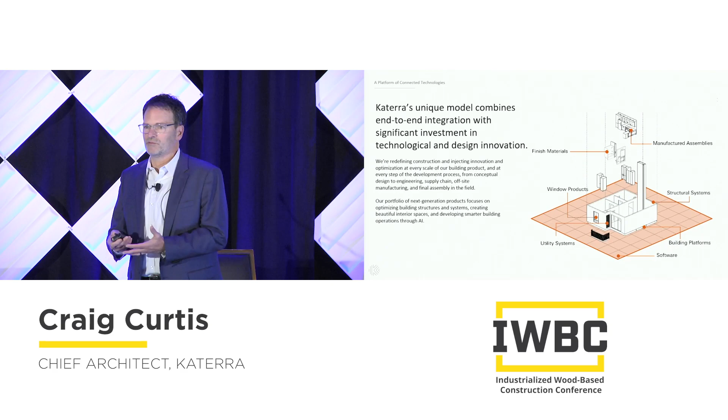And then my role as chief architect is to make sure this does not become cookie cutter. The often overused analogy, or metaphor, is the automobile industry, but I'm going to use it anyway because I think it's a good one.

When you think about picking a car, if you buy a new car, you've got options on the inside, and you know for sure that no matter what option you select out of that catalog, it's going to look great because that manufacturer owns the supply chain, and they know every possible combination, and they're not going to put something in their catalog that doesn't look great.

So we're taking that same approach. We have a narrow supply chain, a narrow catalog for our multifamily sector, but we know every product has passed our test, not only for aesthetics, but for environmental responsibility, for social responsibility if these products are made in Asia. And so any combination of these materials we feel really good about.

Then we can also go and design our own products where we feel like we want to have even more control over those things where the customer actually comes in contact with. If we don't see something in the marketplace that meets our requirement or meets our price point, we'll go straight to the manufacturing floor in China or wherever and have that product made, put our name on it.

Now under the brand Kova, which you can go online and shop for things like door hardware and plumbing fixtures that are a Katerra brand under the Kova brand. So we have a light fixture line, we have accessories, fixtures, and we'll continue to expand that Kova brand of things that we feel really good about. They're beautiful products, very high quality, and we can provide them at a very, very good cost.

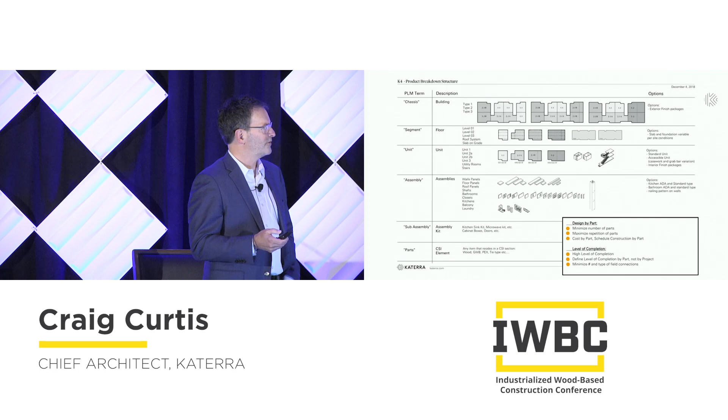So we're really excited about this product. Three different units, optimized, very few — there's a very limited kit of parts that we have to be responsible for. Each of these manufactured assemblies we want to be able to make in our factory.

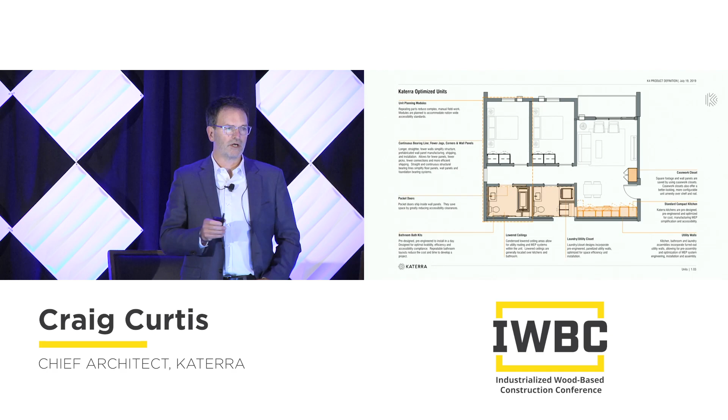And then the planning is very smart. So you can see on the bottom of the page, all of the services are organized along one floor panel. So when we look at that floor panel, this is that same part of the building in the floor panel in the upper right. That floor panel then can be manufactured in our factory, fully loaded with all of the services.

So when that is dropped on site, that's it. All the services for those 2 units are completely done in that one assembly. And that allows the rest of the building to go together very, very quickly.

So it's that kind of thinking that's been really interesting as an architect to work for Katerra, when we're thinking about putting these buildings together more as you would assemble a phone or a printer or an automobile. It's really we have to take it to the level of a bill of materials, which is not common in this industry. So we have to think about manufacturing in a new way.

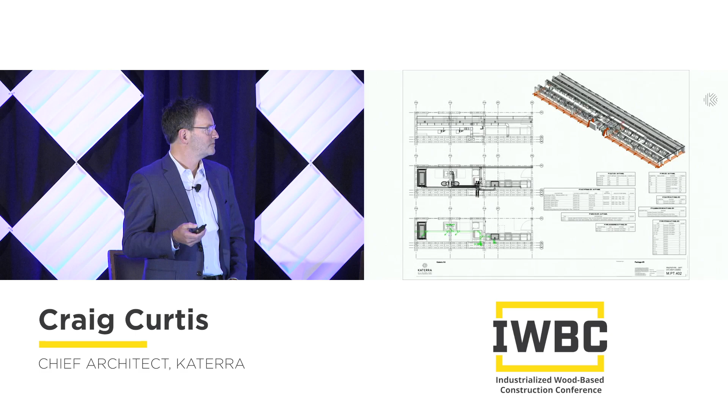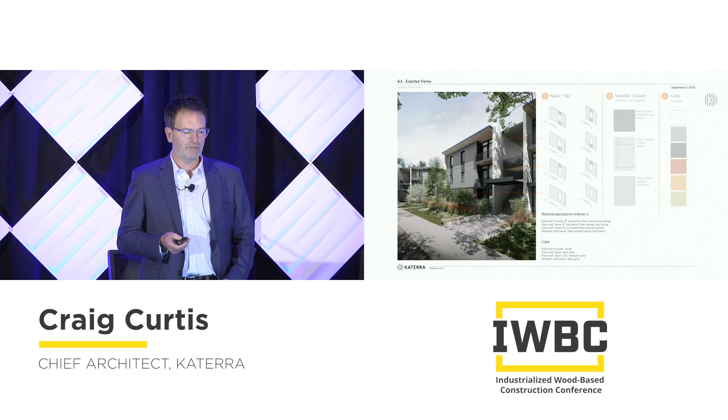We're still trying to apply lots of options on the outside, though, so you can meet jurisdictional requirements, provide that kind of variety, provide that mass customization. So in the case of our workforce product, we have different materials, different colors, and different arrangements. All of those components can be made in one of our component factories.

Currently, we have one in Phoenix, and I will not be showing you that today because I think it would be embarrassing to this crowd. We've got a sophisticated group here who understands what it takes to put together an automated factory, and the Phoenix factory is not an automated factory. It's factory 1.0 for us.

We learned a lot, but the factory that you see here is under construction in Tracy, California right now, and this is one that we're going to be very proud of. We've taken a lot of lessons from our first one and applied them here, so we've got a lot of robotics going into this factory. It's over twice the size at 600,000 square feet, but will employ about the same number of people as Phoenix.

So the lines are much more automated. We're using self-guided vehicles for a lot of delivery around the factory, and we're excited about this factory. This will be copied again in Texas next year, and then we'll look for a place in the Northeast probably the year after that. So the goal would be to have 4 or 5 of these factories across the country within the next few years.

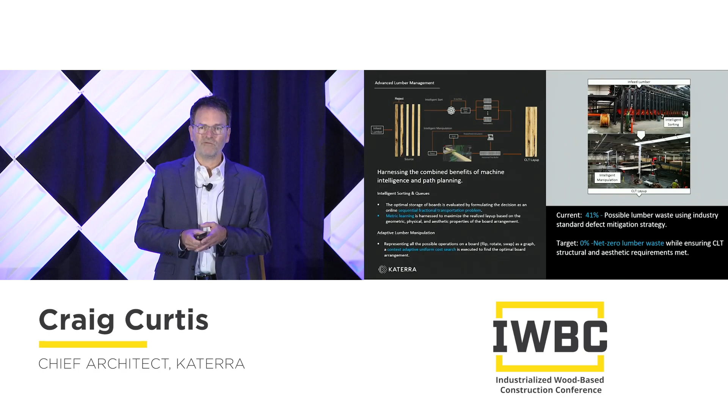They can help us write very complicated scripts so that every board that comes in and gets scanned, we'll understand exactly the properties of that board. So if you have wane on two boards, you can't have that wane lie next to each other because it creates a big enough void that it doesn't meet specs for glue coverage. We can read that material information and figure out exactly where to put that board, face up or face down, across an entire lamella in a panel, 12 by 60.

That layout can be done using artificial intelligence to help us cut waste down significantly. We can take a lot of boards that typically would be thrown out and find a place to put them in that CLT panel without diminishing the structural properties. So we're excited about that.

Here's just a little video of the CLT factory. This hasn't even been published on our website yet - it's a brand new video that just was put together. Again, we just opened this factory in July. It's a quite impressive plant.

When it's at full operation, it will be on par with the big plants over in Europe - Stora, Binder, or KLH - about 180,000 cubic meters a year at full capacity. We're just ramping up now, running 4-10s and trying to get everything commissioned. We've got a good pipeline of projects, but we're definitely looking for more. Definitely a sales pitch here: if anyone's looking for CLT, we do have some capacity over the next 12 months for sure.

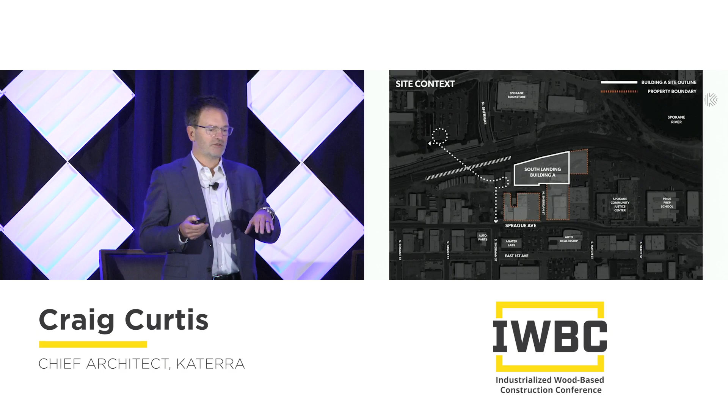This is right across the railroad tracks from the multi-university district in Spokane, where University of Washington, Washington State, Gonzaga, Eastern, Whitworth—there's a lot of universities who have space in Spokane. They built a pedestrian bridge across the railroad tracks to South Landing, and this is the first building in that new development. I think this part of Spokane is really going to take off.

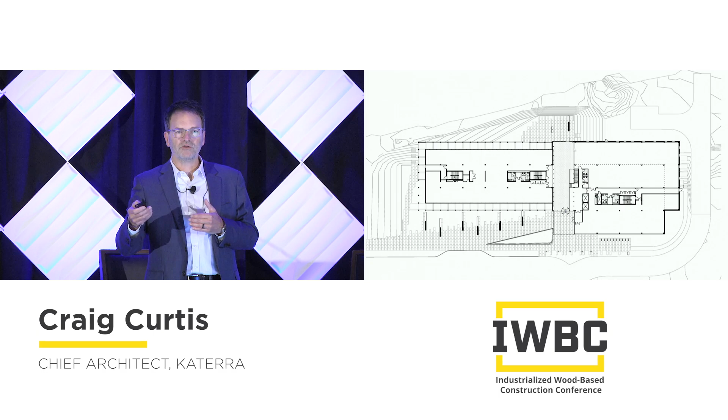It's divided into two with a common two-story atrium. Because Eastern decided to move in here, we quickly realized that we needed to expand our column grid to provide 900 and 1,200 square foot classrooms. So what you see here is a typical classroom floor—a combination of small and large, or medium and large classrooms, and a perimeter corridor.

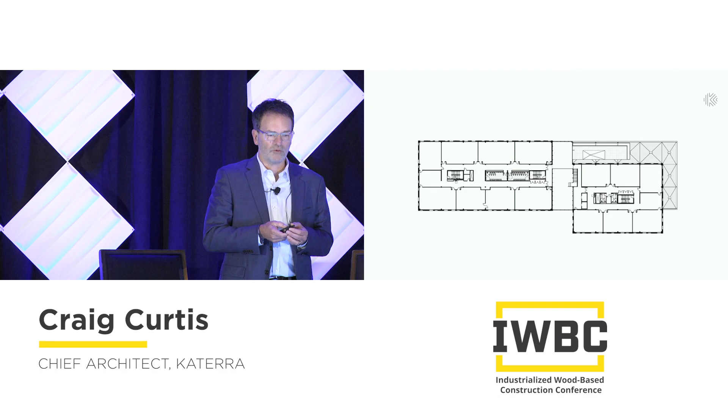Around the core, to get that 30-foot span meant that we had to add some glulams. We can't get that kind of span out of a 5-layer CLT panel. This is a technology we saw being used in Austria, decided to adapt it here, and I think this is the first application of this product in North America.

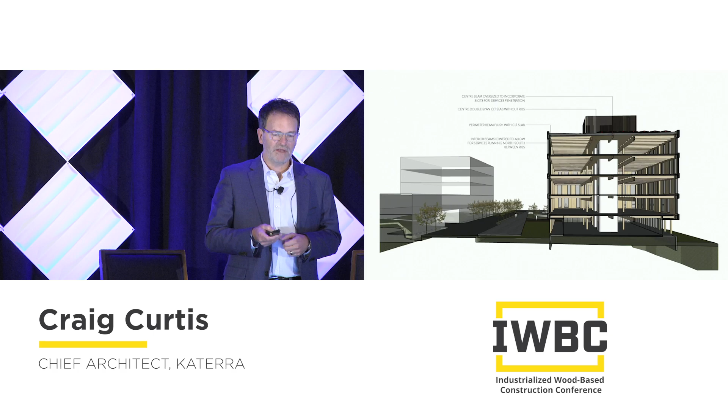What you see in this section here are the rib panels over the classrooms at that 30-foot span, and then in the center we add an intermediate beam. You can see that that's dead center on the core. That cuts that span down to about 15 or 16 feet, so we don't need the ribs. That allows extra height in those corridors to run our trunk lines of ductwork and our cable trays. So all of our main services run around that corridor where we don't have the ribs, and then we feed over the top of that big girder and in between the ribs into the classrooms.

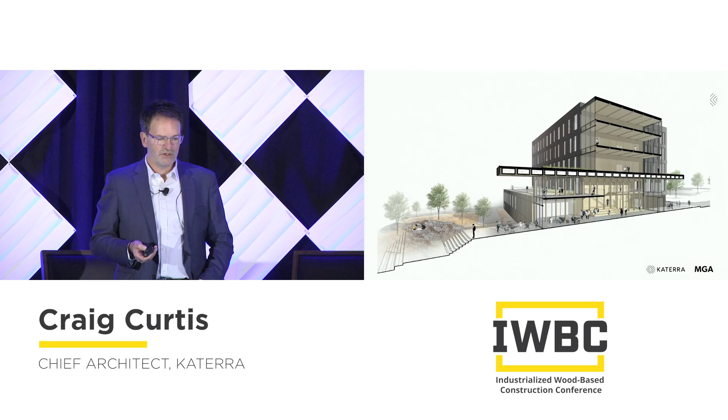This is a two-story atrium space. This was a building that was designed with Michael Green right before he joined Katerra. We worked on this together, and then he became part of Katerra. So it was a good collaboration between Katerra and Michael Green Architecture.

Two-story lobby. This is somewhat unique about this building as well—the exterior skin is being constructed with a 3-layer CLT panel. Now, of course, we certified a 5-layer panel right out of the gate in July in our factory, but we didn't have a 3-layer panel certified yet at that time. So we turned to our friends up in Penticton at Structurlam. These panels are actually from Structurlam.

These are two-story, 3-layer panels with all of the exterior insulation on the outboard side. So a super high performance panel, triple pane windows—it's passive house technology on the exterior skin, R value of about 40. This is designed to be a net zero energy building when it's done.

This building is now topped out. Most of the exterior is on. We're just starting with the exterior cladding system and starting with all the MEPF. So pretty exciting—first project out of the factory went together so well. We couldn't believe it; it was just like everyone's dream. It just went together as quickly as everyone had hoped for, and the panels just fit like a glove. This new way of building is really exciting, and everybody in our company is ecstatic about how it's going so far.

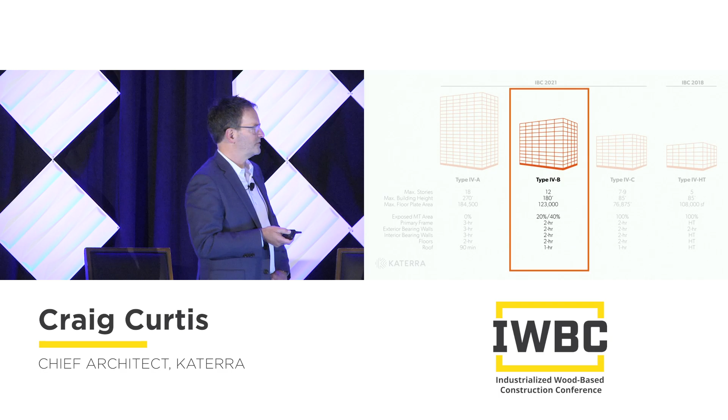But with the new code coming out, and a lot of states are early adopters, including Washington and Oregon, this Type 4B is a sweet spot, we think. This 12-story mass timber multifamily product, we think, is going to really take off.

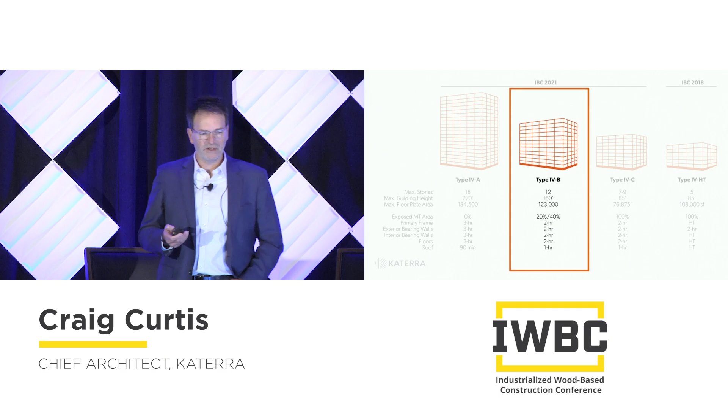The way we look at it, there are a couple ways to take advantage of this. One is we could just go straight up 12 stories multifamily, but then you're leaving a lot of height, because you can go 12 stories, and you can also go up to 180 feet.

So another model that we're looking at as part of the platform is inserting a loft space. So at maybe every other floor you've got loft units that have a second floor bedroom loft, and that allows you to get up to that 180 feet, take advantage of that height, and add a little bit more rentable area.

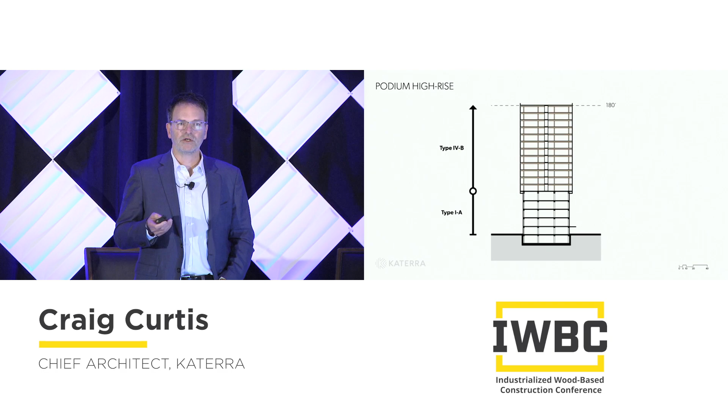Another way to do it is just to build a taller podium. So you can go Type 1 up to whatever you need to get to as far as podium goes, and then take the rest of the way up to get to 180. So these are all part of the platform we're developing within that Type 4B, and this is essentially the kit of parts that we're working with.

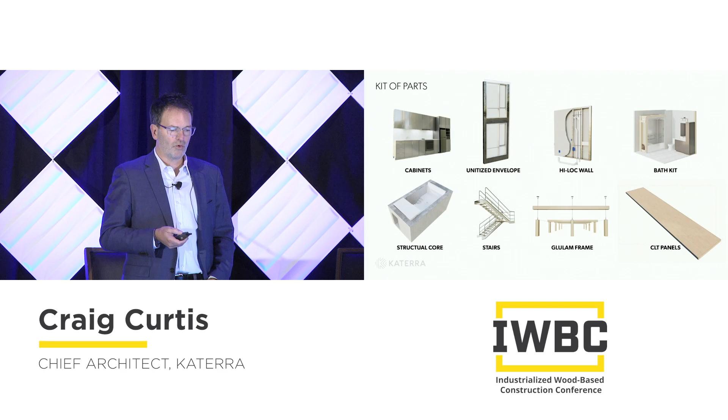Specifically around the CLT panel, our press is 12 by 60, so not cut down to about 11'9" in width after we trim the ends. So what we're looking at is the most economic way to take our panel and utilize it for our products.

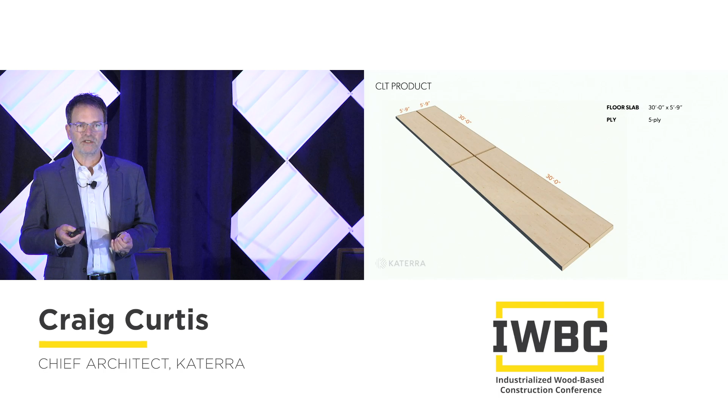So this is what's unique about having our own factory - we can design our product line around our factory capabilities. We want to use every cubic inch of fiber that's put in that press every single time, because that will drive the cost of that product down significantly. If we have zero waste coming out of the factory, then we're going to have a very good price point on that CLT. So we're designing our products around that.

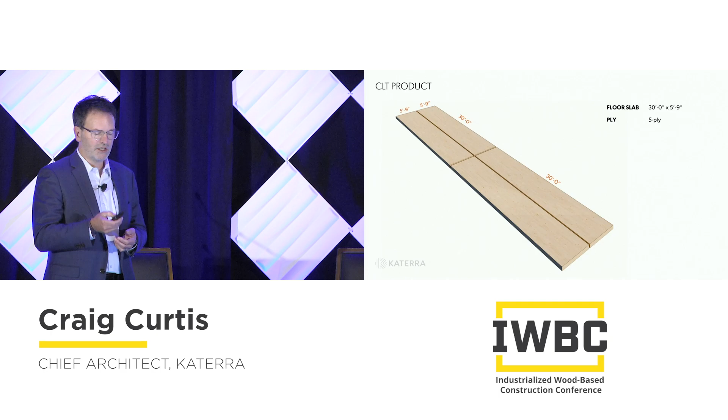This is taking advantage of that 30-foot long, 5'9" wide panel, and a very efficient structural system. What that means is now, instead of starting with unit planning, we're adjusting our unit planning to the manufacturing capabilities. So we're working backwards and saying, if that's the most efficient way to get material out of our factory, how can we design unit plans around that?

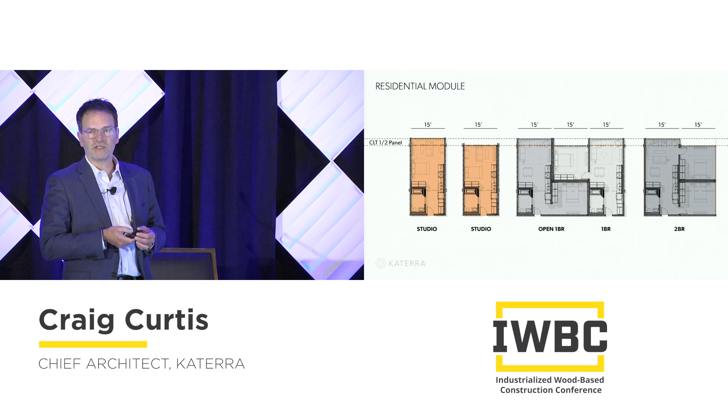Be very, very strict. If these are 15'6", then we're kind of screwed, right? Because we've got a 60-foot long press. So it's just a different way of thinking about design.

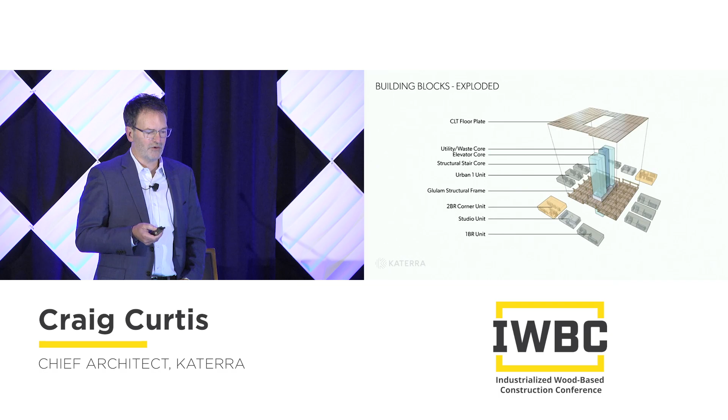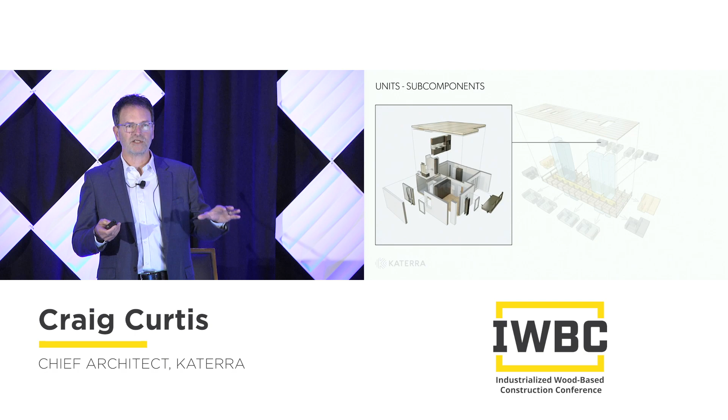So this is our kit of parts. This is kind of a standard, very hypothetical building that we started with. And then if you blow this up and look at the components that go into a mid-rise multifamily building, you get back to that initial diagram that I showed you. So we already have a lot of this stuff designed - this is in our catalog. We can throw this right into this next platform and be ready to go.

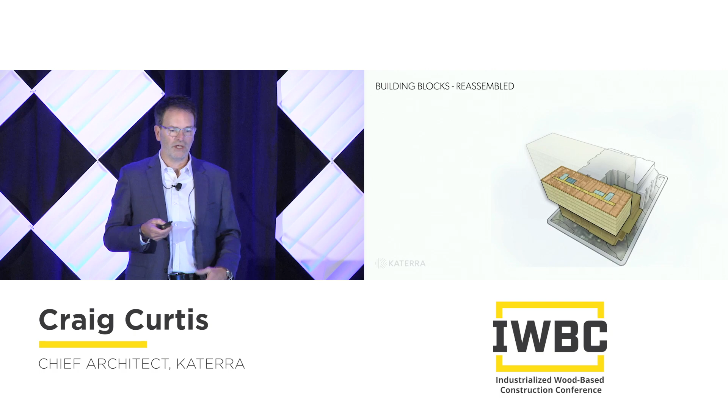Now we just need to take anything that's new with this platform and pull that in to make it real. So this is an example of how you can rearrange that on a specific site, use that same kit of parts, and end up with, in this case, 12 stories of mass timber over a podium.

This is actually a real project that I'm showing you - one that we have going in the Pacific Northwest right now. Very narrow site - this is typical now, these sites are becoming more and more challenging. This is perfect for mass timber though, because it will go together so quickly and have such a small disruption on the site. There are 50% fewer trucks delivered on a mass timber site than on a typical post-tension concrete site, so that's very appealing to the city and neighbors, and also to our construction team.

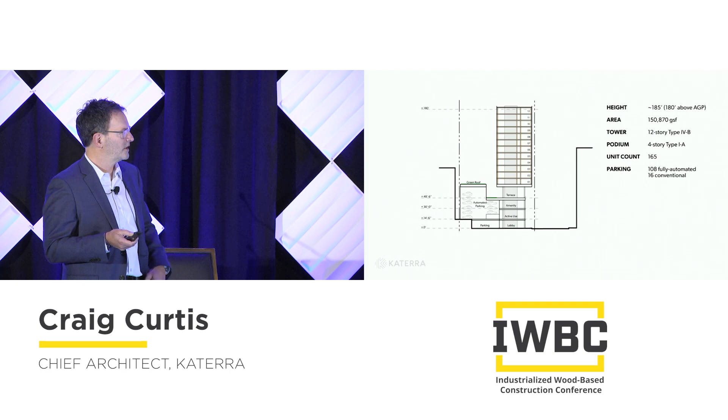So this is essentially how this building is put together. We've got this beautiful timber tower on top of a podium. In this case, we have an automated parking system because the site is so narrow - that's the only way to get the parking to work.

So we're excited about that platform.

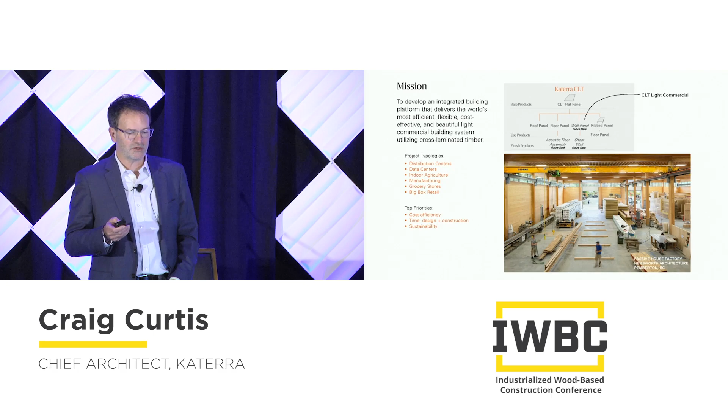Another one that completely changes gears: you wouldn't think of mass timber being used for light commercial, but we see a massive opportunity out there. Our goal is to provide a fresh alternative to tilt-up concrete. We think using our CLT for exterior walls of light commercial is going to be the way to go in the future, and there are a number of customers jumping on board as believers in this. If we can drive the cost of this product down to be competitive with tilt-up, who wouldn't want wood on the inside of their building, and who wouldn't want to tell that environmental story, that carbon sequestering story? It's just a much better product.

The other thing is we can provide a design that allows you to remove those lower panels, so if you ever want to switch things out in the future, that's so much easier to do here than it is with tilt-up concrete.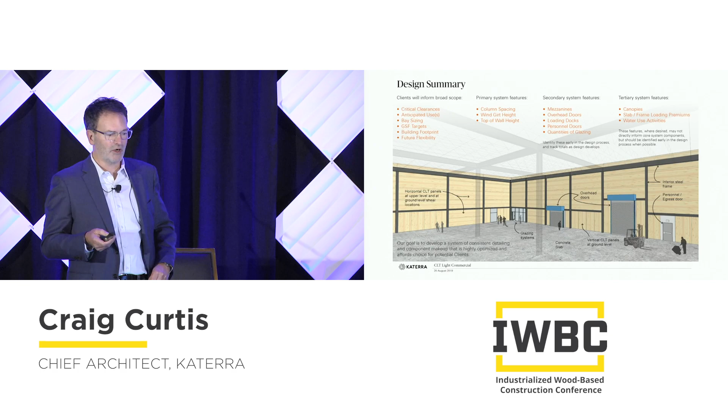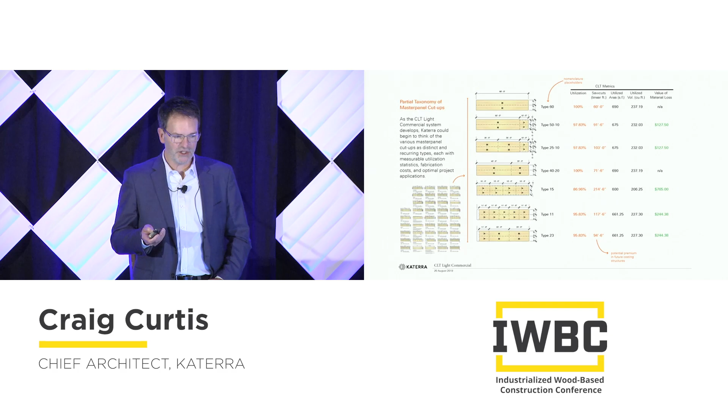So we're designing this system around the factory capabilities. We're looking at how we can fully utilize our master panels, using combinations of horizontal and vertical layouts. We can create a catalog that's plugged into a parametric model, and depending on the customer's inputs—span, building height, number of roll-up doors—we can let the computer do a lot of this design work for us. The engineering can be part of this parametric model, and it can all be based on our master panel.

Every one of these options we're looking at, we're trying to maximize no less than 90, hopefully no less than 95%, utilization of our master panel. We're working through studies of this right now, also looking at things like simply having an allowance for openings as part of the model. In this case, you can see we've got only 5 master panels required to do this facade, with 600 square feet of opening that can be divided into storefront or roll-up doors or whatever.

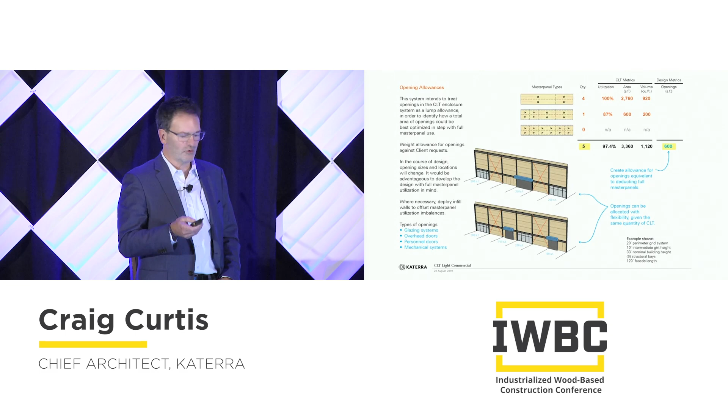Here's one where you can double that. You get up to only 13 master panels, and you get 1,200 square feet of opening. If we come up with formulas that fully utilize our master panels and make it very easy to put this together, you can imagine what this does to the cost of this product.

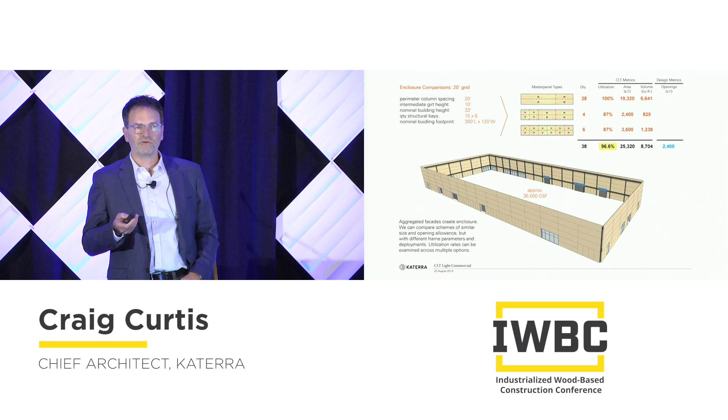Here's a 36,000 square foot building that can be put together with only 38 master panels. We did some calculations and determined that when our plant is operating at full capacity, with 2 shifts going 7 days a week, we can actually produce enough panels to skin a 100,000 square foot distribution center in 1 day. That's pretty remarkable when you think about that.

Compare that to any other type of construction. To provide that kind of output to this market sector, we think there's a lot of potential. These are various configurations—this one is interesting with a 23-foot grid. We can create a head that's at about 14 feet, which is perfect for a mezzanine. That's another part of the parametric model that can be plugged in.

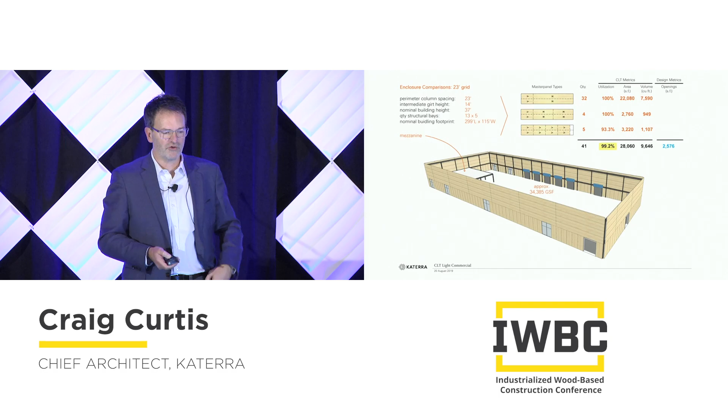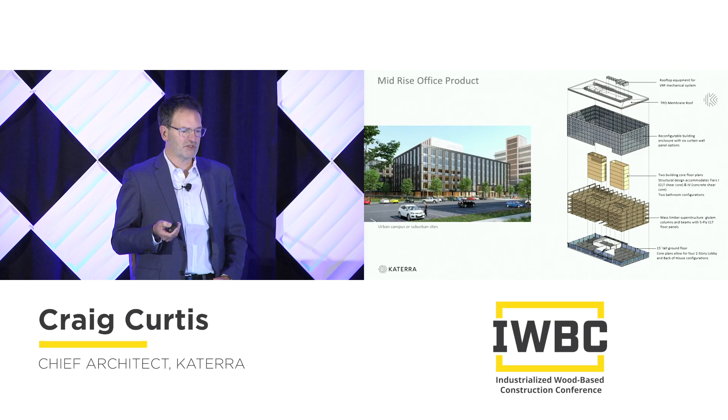The last platform I'll talk about is the mid-rise office platform. We're also working on an optimized version of commercial office—this is either a 4, 5, or 6-story commercial office building. Again, there's a minimum set of inputs we need from the customer: different lobby configurations, different seismic considerations, and things like that. But much like our multifamily platform, we're looking at how many of these things we can set up front and make consistent every time, and then only allow modification where we really need it.

And then how can we drive cost out of this? We started with what is the most economical building structure for this particular span. This 120 by 240 office plate is very ubiquitous across the country—that 30,000 square foot floor plate, you see it all over. If we can span from our core all the way to the outside wall with one column, and do double span with all of our CLT panels for efficiency and vibration control, then we can really drive the cost down to where we can compete with any other building type at this size.

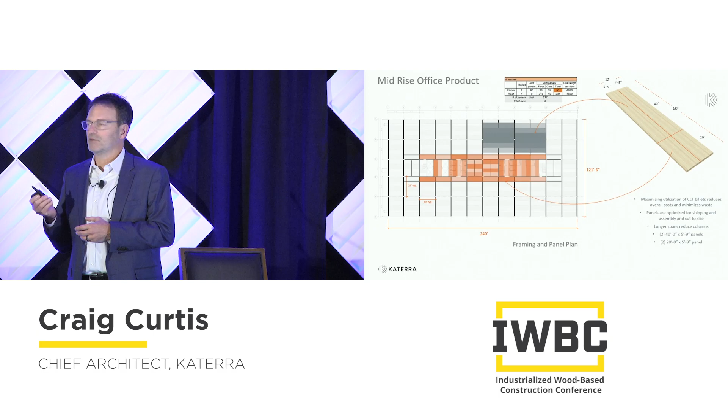It's also about utilizing that master panel. If we're cutting 40s and 20s out of our master panel, we can take those 20s and use them around the core where we have a higher load requirement. We can get really creative with our structural engineering team and provide a solution that uses every one of our master panels and, again, drives the cost out of this product.

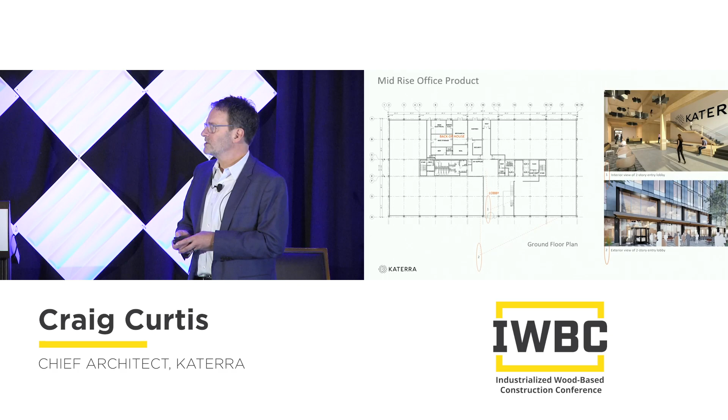Various configurations of the lobby, back of house, and different configurations for the restrooms, again providing that catalog of opportunities for the customer.

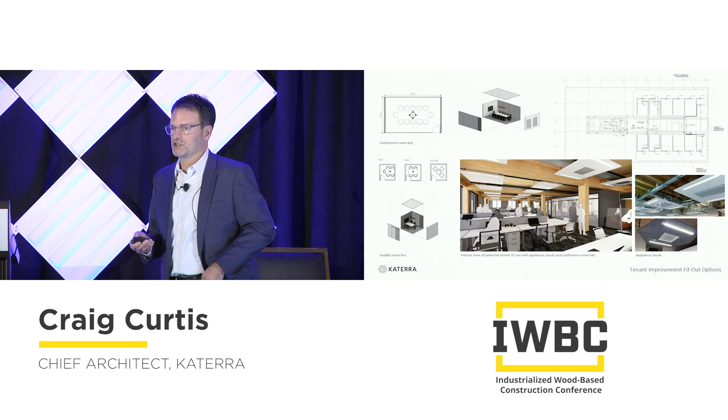We can provide conference room kits, and a lot of our interior finishes and things like that can come right out of our catalog. And then we're working with our partners at McKinstry to develop mechanical, electrical, plumbing cloud or appliance that they can plug into the ceiling, of course, leaving all of that wood exposed, but coming in with a prefab approach to our MEPF systems, just like we're doing with the rest of the building.

And then on the exterior, multiple options again, trying to stick to a 40% glazing so that we can use the prescriptive code just about anywhere across the country. Customers would be able to move away from that if you want more glazing, if you want to spend the time to go through a performance-based approach. But we want to have it available in our catalog to make this very, very quick to get to market.

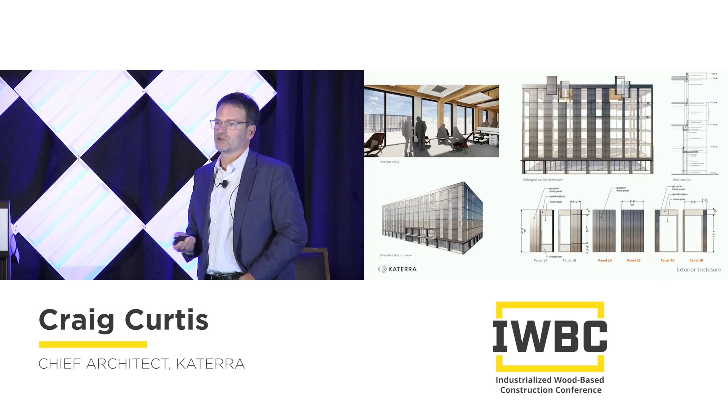So if we can cut 50% out of the design time to get to permit, and then another 30% out of the construction time, that's a big deal to these customers.

So that's our office product. And I just want to end with one thing. Is Mark Wishnie still here from the Nature Conservancy? I don't know if he's around still, he may have left. But I was on a panel with him earlier this year, and I asked him if I could borrow a couple of his slides because I like ending with his story.

And he probably shared this with some of you yesterday if you heard Mark Wishnie speak. But the fact that the Nature Conservancy, with their 10,000 members and 600 scientists on board, see mass timber as a potential lever to pull on climate change, that gets me really excited. And so I like ending with that this is not just about disrupting the industry, but this is about building in a smart way and doing something that I'm really passionate about, and that's building more responsibly.

So the way to leverage mass timber is by not just building hundreds of these buildings, which we have on the drawing boards right now, but we have to change the industry and build thousands and thousands of buildings in this way. And this is what they believe too, and this will make a difference.